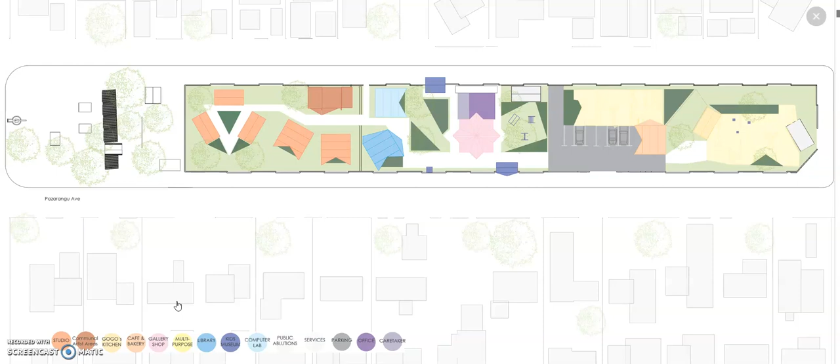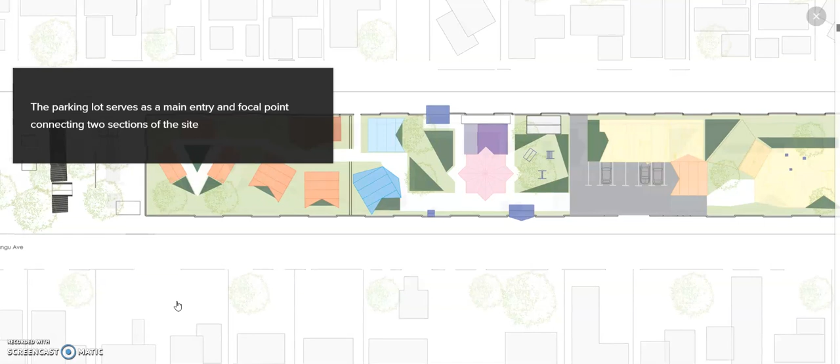And so the parking lot also serves as the main entry and focal point, connecting these two sections of the site, going from the semi-public to public. And the parking lot can serve additional functions as a marketplace with tents and tables, while also being utilized as an overflow stage and seating area for large presentations or performances that happen in the multi-purpose spaces adjacent to it.

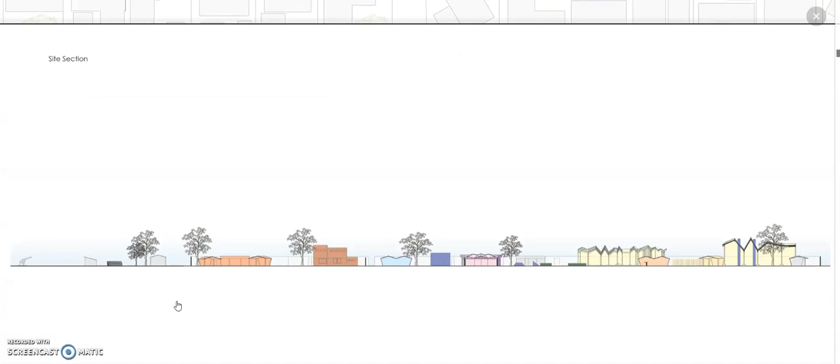And so you can see the flow from public to private emphasized a little bit more here, because the buildings on the left are actually quite smaller and more intimate, and then as you move to the right, they do get larger volumetrically in space and height.

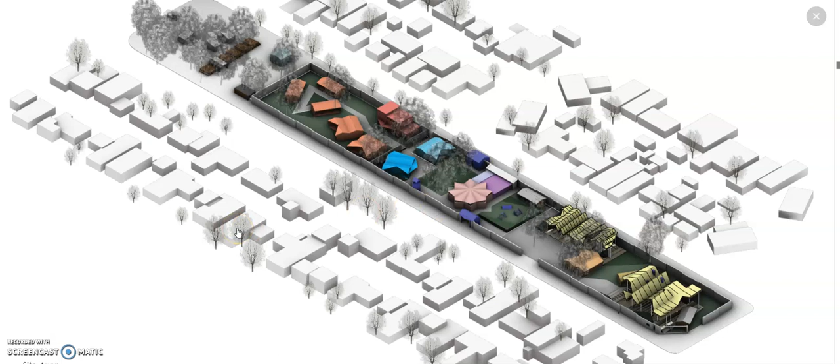And so you can see better in the axon that volumetrically the spaces are rectangular, but then contain angular and cut roof structures that create overhangs and interesting spaces and interesting shapes and geometry that relate them all back to each other and relate them to the site as well through the angular gardens and paths that are cut between them.

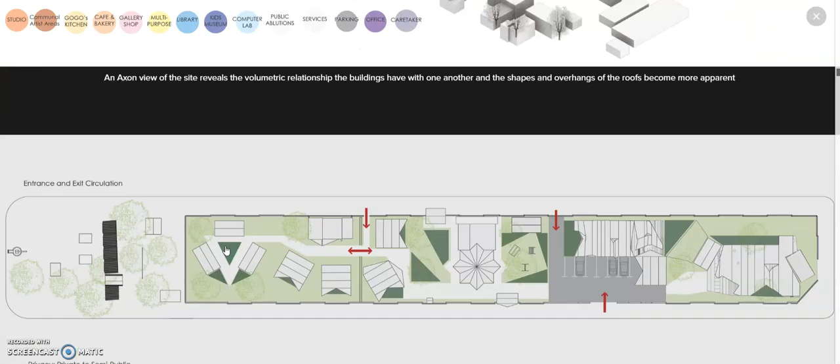So once again, the entrance and circulation: there is one large main entrance and then two side entrances on the back, and then there's only one entrance into the artist area, making it the most private. And so as you can see, the privacy is the darkest area on the most left side, and then it begins to move into semi-public and then more public as you begin to get to the center where the main entrance is.

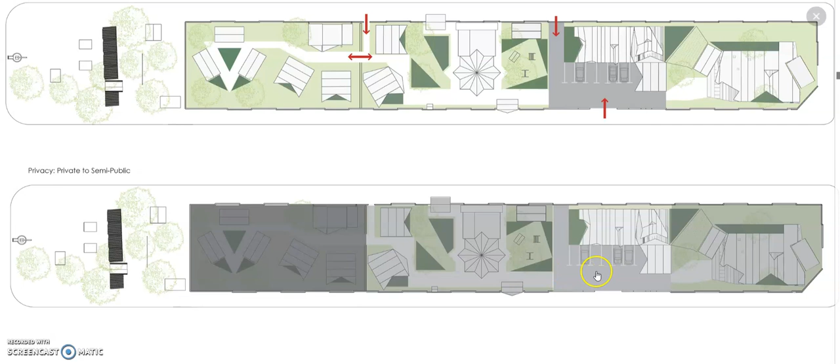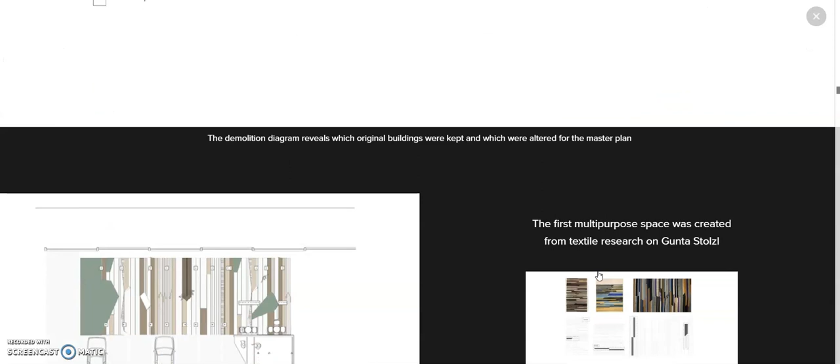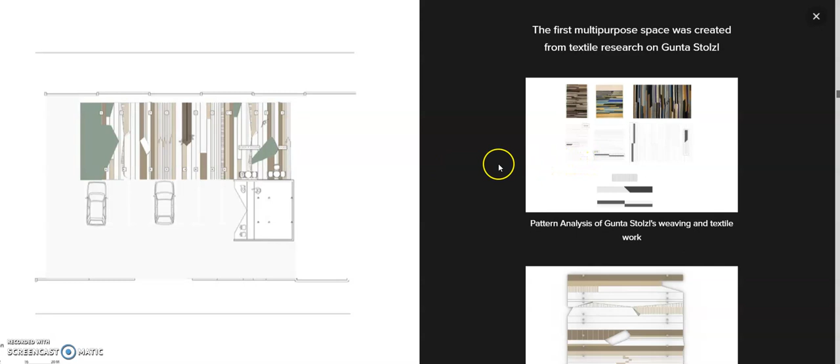So the first multi-purpose space contains a cafe and a small space for an exercise class or small group gathering, with also an eating space next to the cafe and a large performance space. And so these shapes and cuts come from textile research on Gunta Stolzl done earlier in the semester, and you can see that the floor is actually very similar and derives from the original floor plan created, with some alterations to the site and additions made on for it.

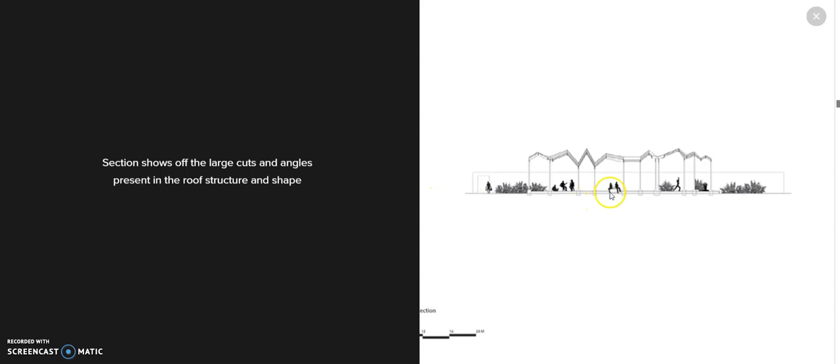You can see in this section that there are large cuts and angles present in the roof, and that some of the floor actually comes up to create a bench in the middle. And the shapes create almost like a larger than lifelike exaggerated corrugated material, which is what the roof is made out of.

And so the second multi-purpose space contains similar geometry in the shapes and structure, but is at a slightly larger scale in order to relate the two spaces back to each other and create a relationship within the site and the multi-purpose spaces. However, this one contains a kitchen, the pharmacy, a small children's play area from large climbing towers, and a secondary performing space that's a little bit smaller but could still be used for gatherings and functions or catering events coming off of the kitchen.

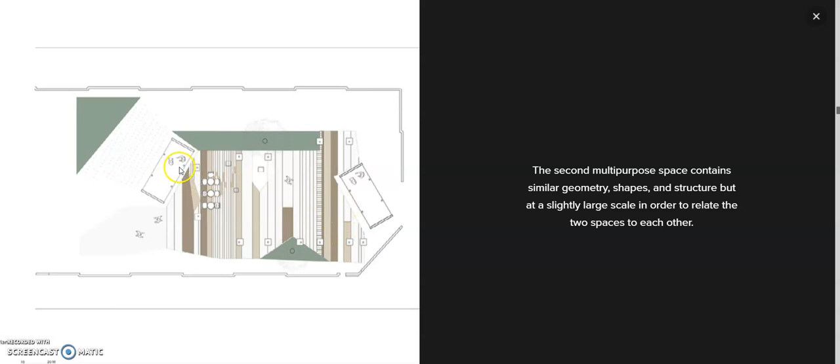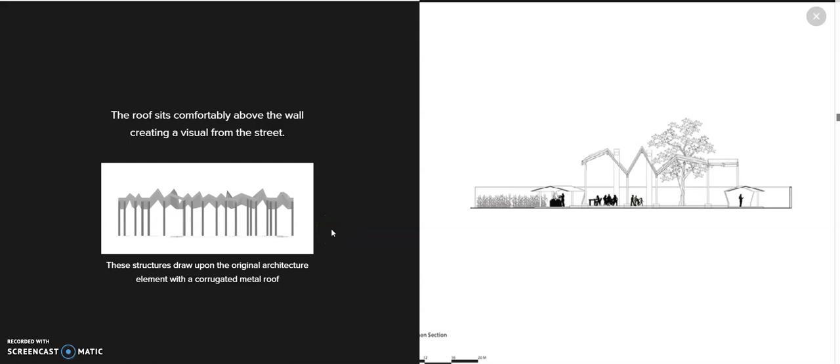And so as you can see, this structure is a very similar but slightly larger shape from the original, and it draws upon the original architecture element structure that was created from the Gunta Stolzl weaving and textile research as well. And both roofs sit comfortably above the wall to create a visual effect from the street, so that all you can see is the roof and the top of the columns coming up, and gives the illusion of the space and activities that are happening underneath them.

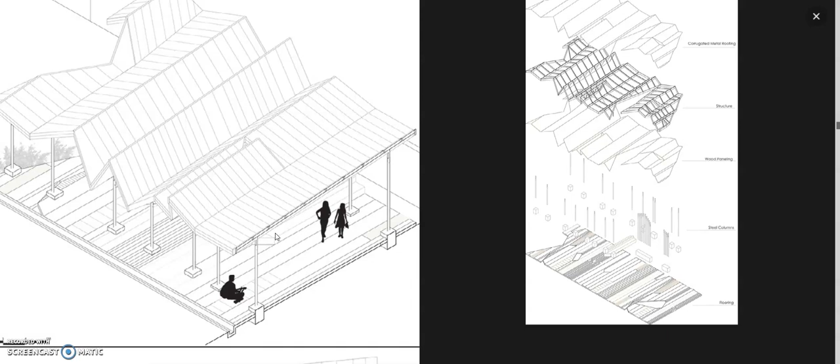So the structure is made up of wooden beams with steel columns, and then wood paneling is the underneath of the roof. So it's corrugated metal roofing, then a wooden structure, wood paneling, and steel columns connected to the flooring. You can see through this section cut that the wooden roof actually sits about halfway up the larger beams, so the beams do protrude a little bit at the bottom underneath.

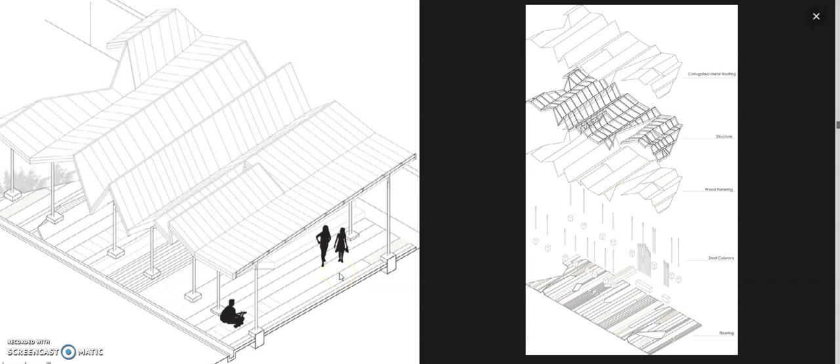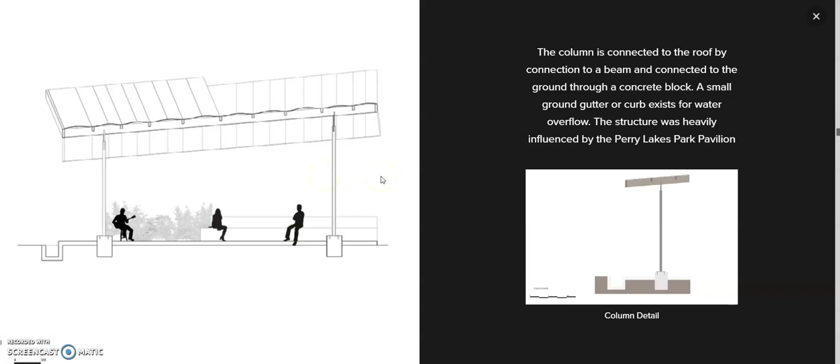And so then to take a closer look, the columns are connected to the roof by connection to the large beams, and then going through to the ground through a concrete block with studs or screws in them. And then on the side, a small ground gutter or curb, a little dip exists for water overflow. And the structure of these multipurpose sites was heavily influenced by the Perry Lakes Park Pavilion structure. They draw on similar structural elements.

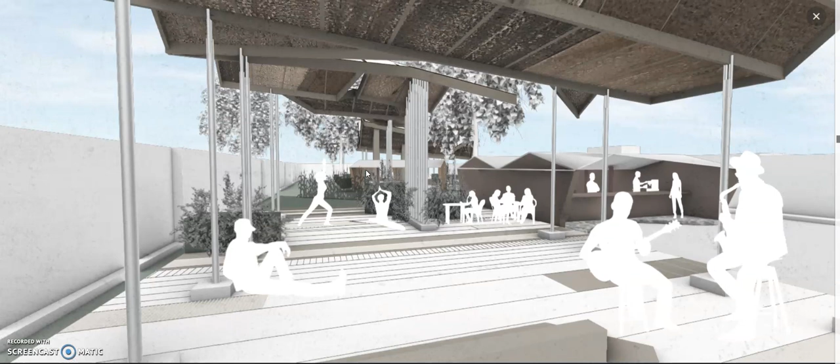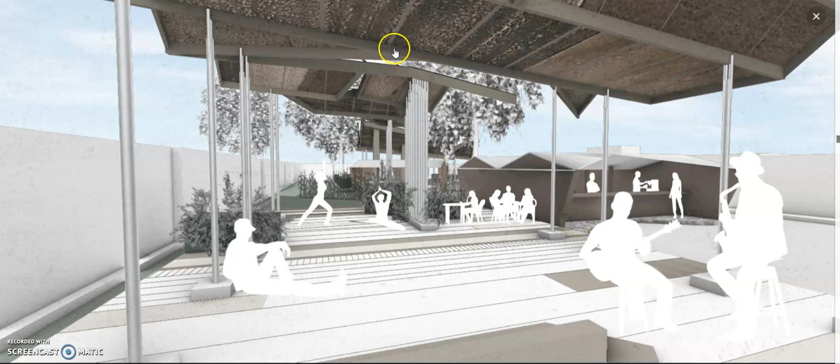And so you can see the space program through this perspective, and how everything would be able to come to life in it, because the natural divisions of the column structure and the vegetation create three spaces: one for eating and sitting, one for small group gatherings and exercise classes, and one for large performances, as well as being adjacent to the cafe and the parking lot and the main entrance. And you can see the wood paneling and where the beams slightly protrude from the roof and the effect that it gives.